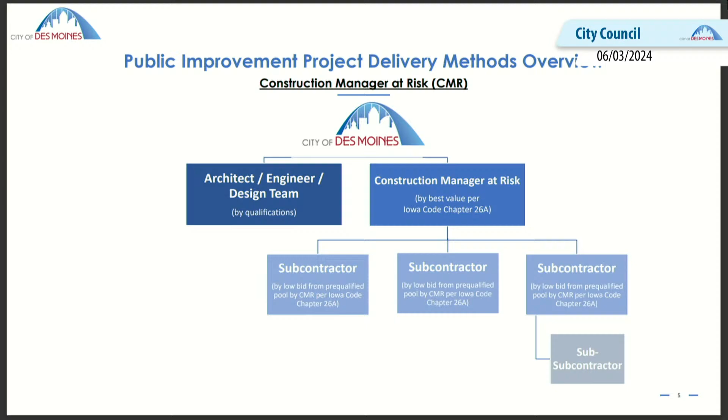This is, and I put up on the board here now, the construction manager at risk process, where we actually hire by best value, under Chapter 26A. And again, I can't thank Kathy Vanderpool and Jeff Lester and that team enough. I know the airport did a project with this, but quite frankly, as a city, this is one of the first city projects. She's in the crowd too, so I get to call her out and point her out for all the work she's done with this new process.

And not only that, we've got 3 buildings we're doing that way. Chapter 26A, best value - which isn't strictly defined in the chapter, but essentially means it's not going to be the low bid. So it's not just the lowest responsible bidder. There is a qualification-based selection process under 26A here.

As the councilman mentioned, in this process we have one contract with the construction manager at risk that we hire, and then they are responsible for following Chapter 26A, and they can use a qualification process themselves to select subcontractors. It's spelled out what they can do in Chapter 26A, and also spelled out what we're allowed to do from a selection process - I'll get into that. But again, in this case, the construction manager at risk is both the advisor and the contractor.

So this is a huge step. This is better than the CM advisor, because they are the ones at risk for delivering the project. They have the direct relationship with those contractors and suppliers. They have the full responsibility of the construction labor, materials, and equipment, and they deliver the project with a guaranteed maximum price - I'll show some information on that in a bit. Again, I want to state that Chapter 26A does not apply to highway, bridge, culvert, and sewer projects, so we cannot do this for our roadways and horizontal projects.

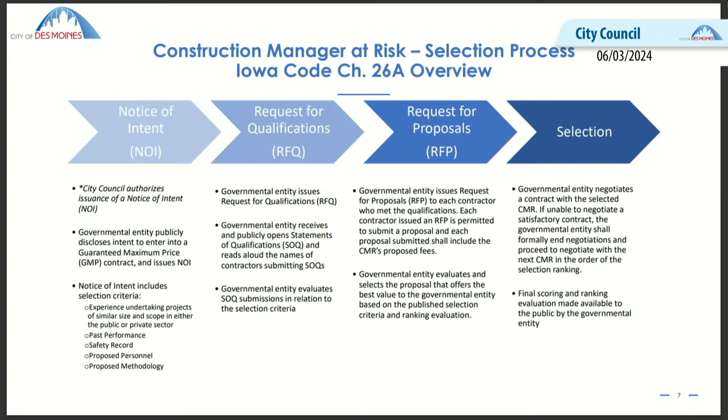Sure, everything here—and this is this chart here. Appreciate Tom Block and Jake Knutson, they helped put this together. This is our scoring, this is how we've scored. Again, you can look at the statement of qualifications—relevant project experience, past performance, safety record, proposed personnel—and then we go through and score them.

There's even cost components that we look at. And then, as the councilman alluded to, we interview and score the interviews as well. We have the construction manager at risk proposers bring their team in so we can meet with them and, to be honest, literally question them so we know that's the team we're dealing with. We're not getting someone in the back office that's just good at putting together proposals—we want to see that the team knows this process. Then we go through the selection process and negotiate a contract.

So ultimately, again, it's the same—the council will approve that contract, as you have for the three firms.

Is the project manager part of the interview process also? They better be, otherwise that would not score very well. So whoever's running the job site will be part of the interview process—the project manager and the lead superintendent as well. If the team didn't bring them, that certainly would reflect poorly. We have a scoring process for selection of professional services for engineering and architecture consultants. I haven't had a case in my almost 10 years being here where a team did not bring the project manager and the interview did not go very well. Let's put it that way.

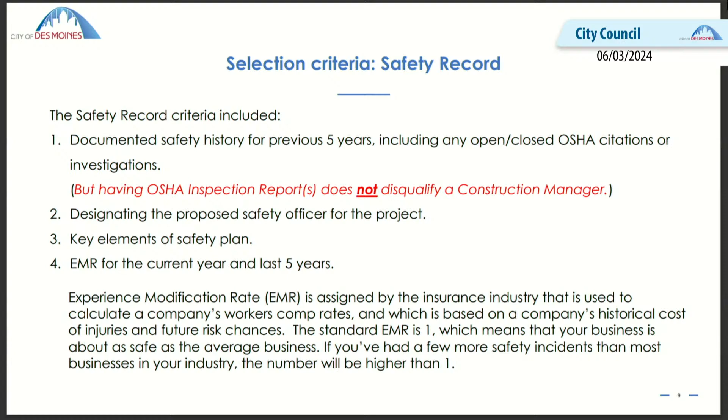Just to give an example, some of the firms we have here with us today have an EMR ranging from 0.42 to 0.62 over the past 5 years. Those are really good scores. So that's really what the information is from a safety standpoint.

Can you go back to the last slide for a second? And so the subcontracting process is under that, right? Nope, scored under the interview. Nope, I apologize—this is the process just for getting the construction manager at risk.

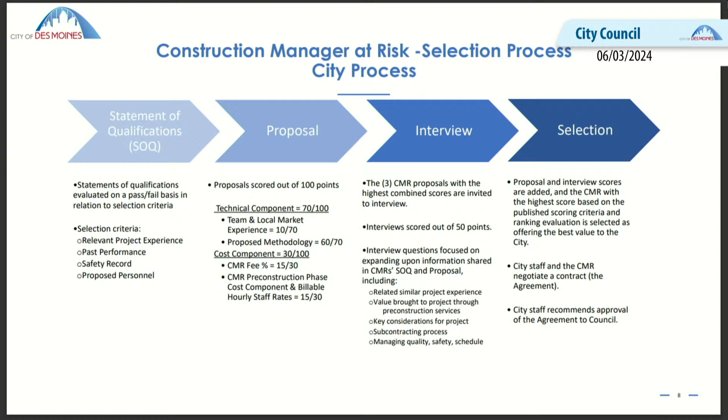The subcontractors, once we have a construction manager at risk on board, are required to follow Chapter 26A, and then they have selection criteria that tells them what they can use to pre-qualify a pool of consultants. Just to give an example, Ryan Companies for Fire Station 4 are already on board as a CM at risk. They completed the qualification portions on May 23rd, and have already set those pre-qualifications.

They've sent out bid documents to qualified bidders. Bids are due in late June, and there are 63 qualified subcontractors across 22 packages that they're bidding, with most packages having at least 3 qualified bidders. So Ryan Companies for Fire Station 4 has already gone through a pre-qualification process to develop pools of qualified subcontractors, and then those subcontractors will submit proposals, and per 26A they would select the lower bid. Thanks for that detail.

That wasn't exactly what I was trying to ask. On the interview process on this slide, it says subcontracting process, right? If they have to show that they understand the subcontracting process for 26A and how they will handle it.

We currently have our post-bid qualification right now, right? For under Chapter 26, yeah. And we've determined that can be used under Chapter 26. So that's something we could ask about, whether or not they would follow that at this stage in the process, right? So that is tied to Chapter 26, and I have a slide on that later.

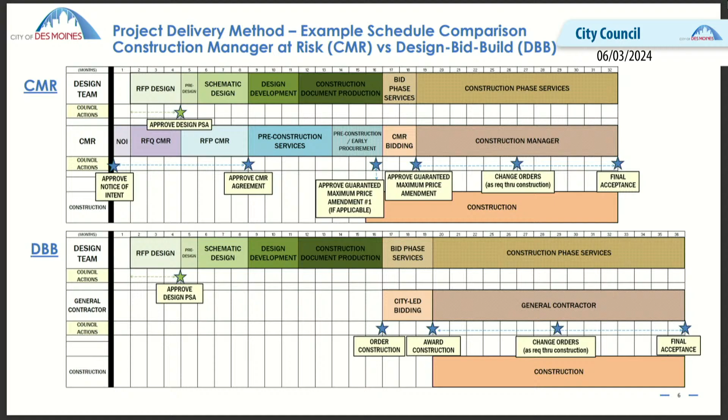So to me, this actually gives more checkpoints and leverage before going, because really in design-bid-build, they're not involved during the design. We're just taking the low bidder, and you all get to approve the contract. I see weaknesses in the other, but I also want to make sure the council has some leverage throughout it.

I don't really want to assume there's going to be change orders. I think that's the beauty of this, that the change orders and hiccups that happen under a construction manager at risk, that's where the risk is. There's going to be unexpected things that happen, and the number of change orders the council has to act on should be minimized because the manager is taking the risk, not the city. When we build in continuous change orders, it makes it feel from the beginning like a wink and a nod—you're really the construction manager at risk, but we know you're going to have to come back to us because something unexpected is going to happen. I think that's just another point where the council is losing leverage.

Those two points—as much as I like this process, I want to make sure we're strengthened there, and I think there's ways to do it. For instance, the council should have a policy about what change orders are even legitimate to bring forward under this new style, because they should be different than under a design-bid-build. In that case, we're taking bids for a project we designed and spec'd. If things have changed, we have to own that a little bit because we asked them to bid on something different. In this case, we're going through the process so they know what's happening and they're willing to take the risk to deliver it as designed.

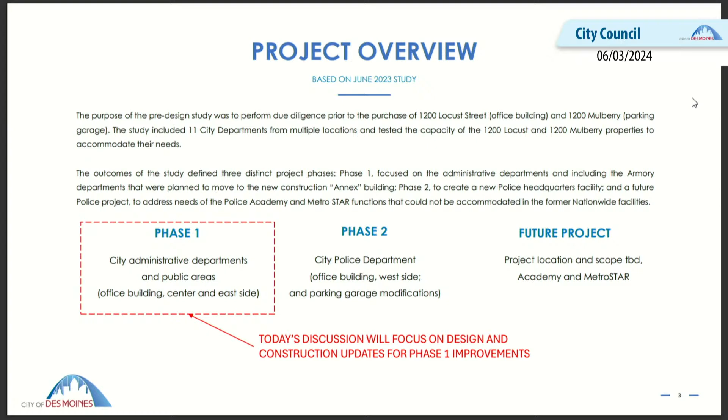It can't be because of the space or because of funding? The last one you just mentioned had to do with the specific types of functions. Okay, that's fine, I gotcha. Big vehicles and other things.

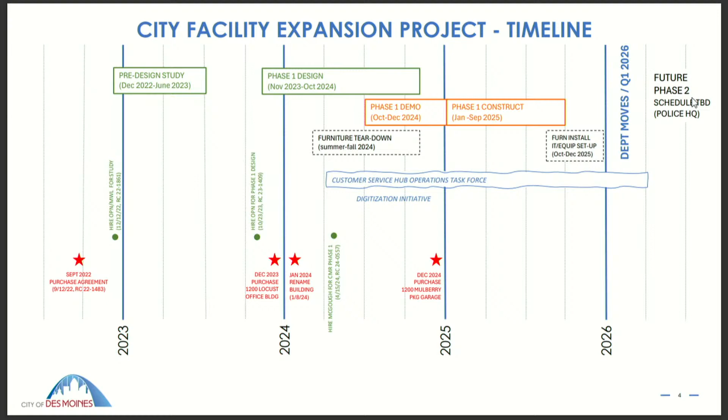On that task force, will you have only staff, no residents or citizens that will actually use the building as part of that task force? At this point, it is only city staff.

The other thing is kind of a preface I wanted to show you because this comes up a lot, especially when you start looking at numbers and size, and it's come up in a lot of our user group meetings. We made this about a year ago. This building is huge - 340,000 square feet across 5 floors. This is a footprint of the building at 1,200 Locust, showing you the comparison of that footprint with some of our existing buildings. Keep in mind, as we look at the scale of what we're doing, this building is a lot bigger than anything we have currently in our portfolio, and it can easily accommodate the departments and functions that we currently have in these other facilities.

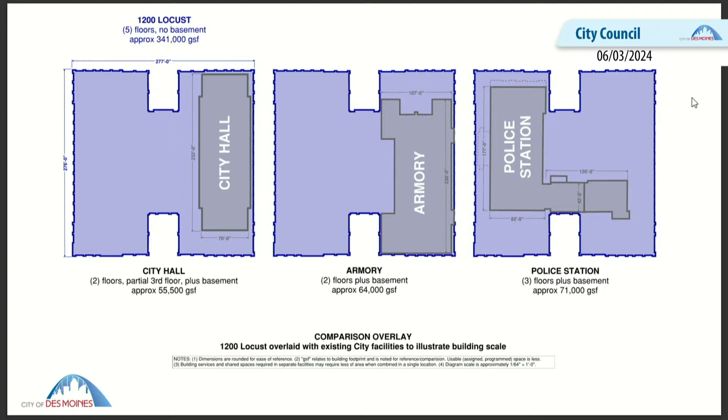This is a summary slide of some highlights of phase 1. We are renovating about 155,000 square feet, primarily on the east side and center of floors 2 through 5. There will be a quadrant on the street level that is going to be the new public meeting suite, which will include a new, much larger chambers and boardroom space. The departments planned to relocate with this phase are listed right below - basically everyone in the Armory, everyone in City Hall, our 2 departments working out of Polk County River Place, and Human Resources, currently over at MSC, will move into this building as well.

So we're relocating 10 departments. We estimate that is around 360 city staff people that will be moved into this at the end of phase 1. And that service hub, we will have 1 location, and you'll see the design concept as OPN comes up to present.

We're basically taking 8 different locations throughout the city in 4 buildings and putting them on the same level with the same kind of first point of access in this facility. The way it will work is we have a multi-layered system where there's a first stop - an information security desk location that can handle the first layer of questions. Then there's a series of transaction windows for specific transactions people have to do with the city. And then we're providing supplemental space to call down subject matter experts to handle questions related to more complex issues - if someone needs to look at a plan for their fence in their yard and needs to sit down at a table. Again, this is putting all those places in one location. In addition, the front doors to housing, civil and human rights, and human resources will all also be on that same level.

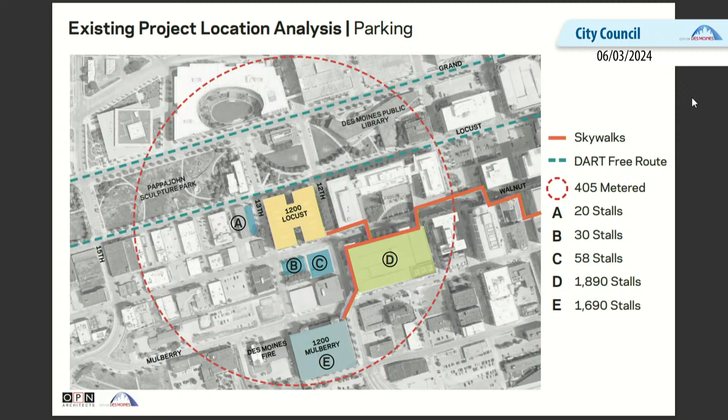Early on in the project, we also did visioning with all of the leadership and some user groups. This helped us establish guiding principles that we've used throughout the entire process, study and design, as touch points as we're making decisions. Those guiding principles included providing a welcoming, accessible, and safe facility for the community, providing modern and efficient functional work areas with more variety and more flexibility long-term, and solutions that will support and encourage collaboration, trying to break down silos between departments and literally breaking down and taking walls out between departments.

As we got further into this process, we used those guiding principles to funnel down into more specificity to create some workplace strategies. These have helped guide how we think about the actual work environments. One of those was to take advantage of horizontal and vertical adjacencies in the building, and I'll show you a little bit about how we did this.

Also improving city services, providing dedicated public-facing zones. As Ann described, that really relates to both our conferencing areas and this new centralized customer service hub space, but that also allows us to create separate secured staff work environments. And then we're going to create open office environments that allow more collaboration and flexibility, and centralize and decentralize some staff amenity and support spaces—I'll show you how those work out in the plan.

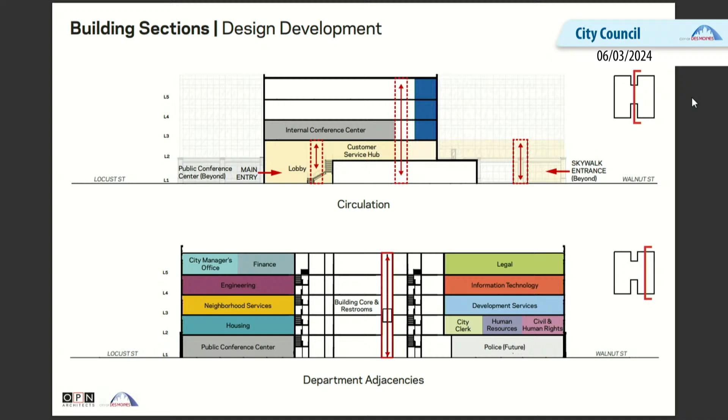So we'll take a quick look at each of the individual plans. I do want to point out that for each of the 2 centralized conferencing areas in the building, we will take a closer look, so I'll have some enlarged plans—we'll just go through these at a high level in the overall plan.

So this is our first level. This is Locust running across the top of the page here. You can see where the red arrow is at the top—that's your main public entry into that existing 2-story lobby volume. The light gray areas on the plan are all those future police zones. As Ann mentioned, we're really only using that northeast quadrant of level 1. The light yellow color signifies all of the public spaces.

So you're coming in off the lobby, you've got your pre-function zone that leads you into the new 150-person council and boardroom area. The darker gray zone is the remainder of the public conference center areas, but those are secured spaces, behind staff escort zones. I'll walk you through a little more detail on that here in a moment.

The hatching on the upper left is just indicating where we currently today have some lease spaces. On the lower left, it's all of our building services area that will remain untouched. So we will have some lease space today; in the future, it's TBD as far as what would happen with that.

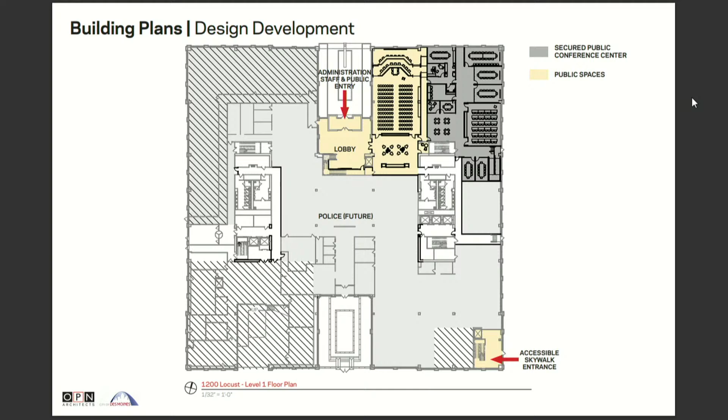Probably wouldn't have that. We have a police station there. At that point. Yeah, okay.

As we move up to level 2, that light yellow color shows all of the public areas. So you can start to see here as you come up those stairs or elevator in that 2-story public lobby, you're coming directly into this centralized customer service hub zone. You can also see how that connects to the city skywalk system, bringing people into that area all in one location.

All of the other spaces on this floor and on the floors above are secured. So you're starting to see here, and we'll see as we go up, that the police spaces stack along the west and all of the city admin spaces stack along the east.

As Ann mentioned, the groups or departments located on this floor were placed strategically because they each have a public-facing element of their own and their own entry lobbies. That's housing at the northeast corner, Civil and Human Rights and Human Resources at the southeast corner, and our city clerk, that's the light green color, off of our customer service hub.

You'll also start to see in the darker blue color some staff amenity spaces that are indicated, and I'll talk about these as they stack up through the building as well.

We've now moved up to level 3, and you'll see here our second conferencing center. This is the internal staff conferencing center located at the middle of the H of the building, that darker gray space. I'll provide a zoomed in or enlarged view of this in a moment so we can talk more about that.

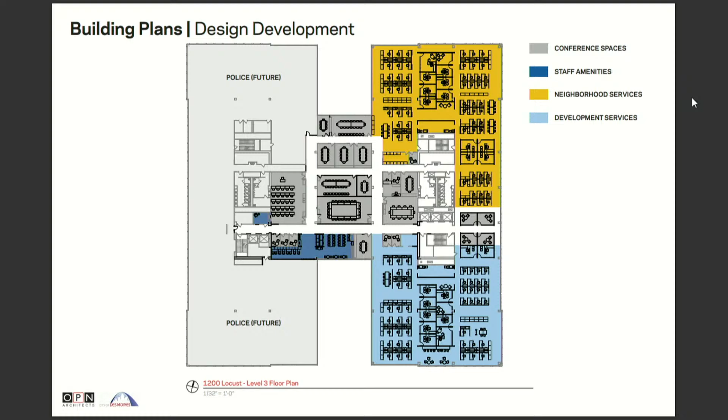These are our kitchenettes and our mother's rooms. On this floor, the kitchenette is a little bit larger, but on all of the floors we've been able to take advantage of where the kitchenettes and mother's rooms in the building were already located and repurpose those. So we're trying to take advantage of existing spaces as much as we can.

On level 4, we've got engineering located at this level, and then IT. IT was strategically placed on this floor because existing infrastructure for the previous IT department was here, so we could repurpose some of their IT lab spaces, and it gave them access to the infrastructure that was already located there, so it made a lot of sense.

The darker gray colors at the middle of the plan on this level are existing conferencing spaces that we'll just be able to repurpose as is, as they stand today. And again, those staff amenity spaces as they're stacking up through the building.

Our uppermost level, level 5, this is where we have our city manager's office. We have legal in the green color to the southeast, and then finance in a little lighter shade of blue.

Here, again, we've been able to take advantage of some existing spaces in the center of the building that are either being repurposed as conferencing spaces or used for departmental storage needs on those levels. At this uppermost level, you can again see where our kitchenette and mother's rooms are stacked.

On the first floor? So this is a zoomed in view of level 1, right off of your main public entry that you're seeing on the left where that red arrow is at.

So right when you come in the front door, there's a set of doors that will take you into a pre-function zone, and then that pre-function zone takes you into that new 150-person board and council space. We do have a couple of rendered views coming up that I'll show you of what these spaces are starting to look like or could look like.

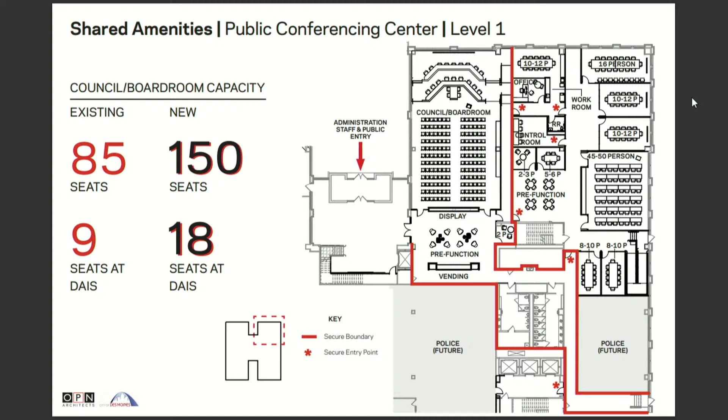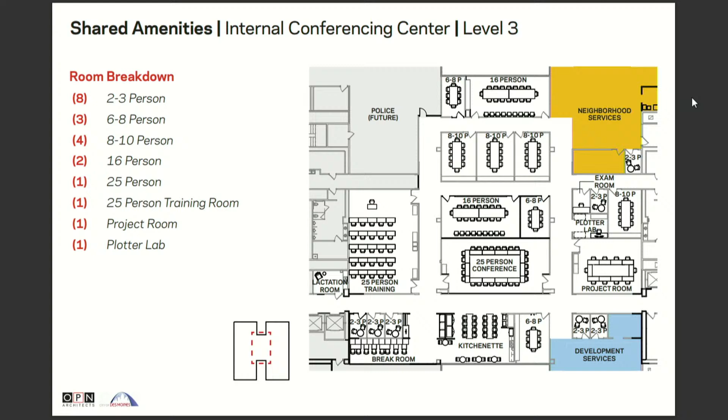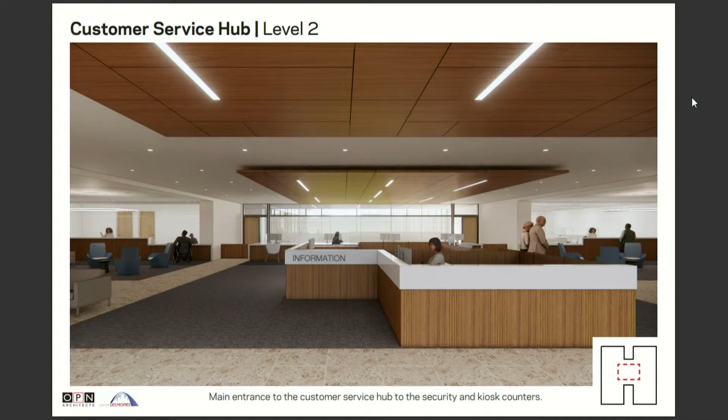This is a view if you were entering that space from the skywalk. So if you're coming in as the public at that level, from a wayfinding standpoint, you've got your information kiosk and service desk straight ahead, and then you have your transaction windows to the left, with a few public meeting rooms to the right where subject matter experts can meet with people if they need to.

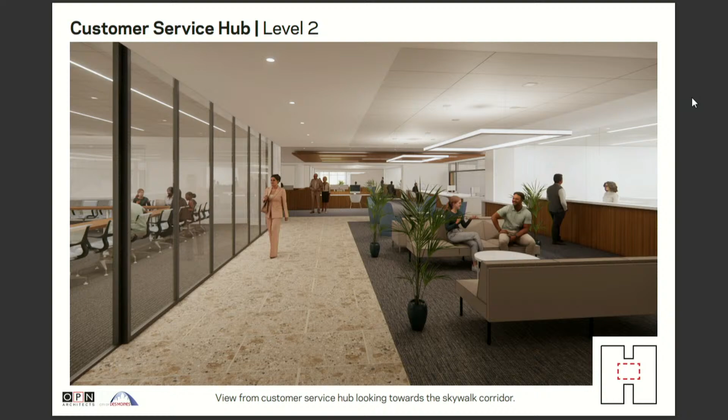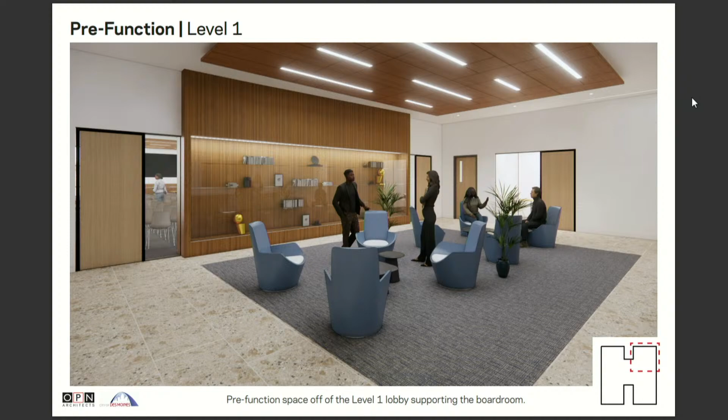Quick question. Is there a committee to deal with ephemera and various—think of all our buildings and the neat storytelling opportunities with some of the things. Is there a dedicated group to help incorporate those pieces into this new building?

That's a great question. As of yet, no. We've talked quite a bit about it, but there's not a group that's specifically working on that. I would ask the city manager to consider that, because this is a once-in-a-lifetime move. And there are lots of important historical pieces that may not even be visible, but should be visible. I would hate to lose all of that or put it all in a storage room somewhere.

There's probably quite a bit in storage. Well, let's get it out and find out. But somebody or a team needs to go through it, and that's going to be time consuming. And how to properly display it, and what do we no longer want to keep.

And we do have a lot of opportunities. I may not have pointed out, but on that front lobby, hopefully you all saw there was sort of a dashed area for future artwork. There's a couple of zones you'll see here in the next image as well. So we have an opportunity not only for some of that historical storytelling, but also to integrate public art in a couple of different ways in the building.

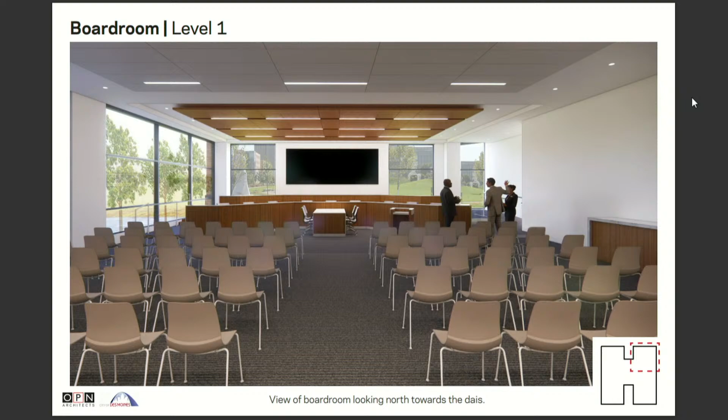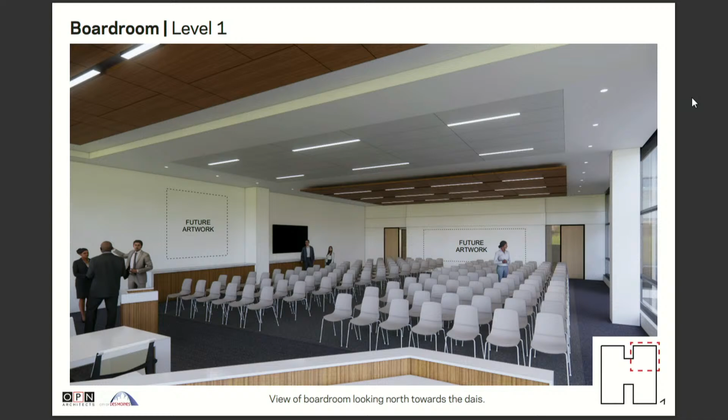This would be your view if you're standing at the dais looking out at the audience. Here again, you can start to see where there could be the potential for some of those future artwork components. I think that was the last view.

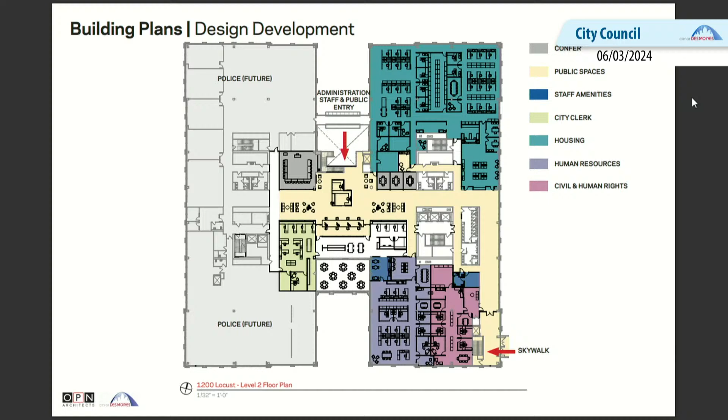Yeah, the idea is the elevator lobby where staff accesses here, you'll see there's doors by the elevators. Those would be badge access, so the idea is 3, 4, and 5 are staff only. So wherever the public goes, it'll be at base 1 and 2.

Okay, the other question was what architecture features from the current council chambers will be incorporated in the new council chambers? What architecture, she is asking maybe for clarification. Basically, is there anything from the architectural features of the current council, like there's a giant, will they be influenced in the new council chamber?

Okay, if I understand the question, the dais at the front is two-tiered instead of single-tiered. That's partially to accommodate the bigger larger boards and commissions. But some of the same kind of organization or layout that you have today would be planned, and those support spaces, much like you have here today, are planned there as well. But it would be much more modern than what we have currently. Correct, it'll be accessible and have all of the technology to support it.

So you can't incorporate any of the etchings or doorknobs or trim or anything like that into the new space? That would probably be hard to take out of here. So yeah, that might depend. I get what you're saying about the historic character. Sometimes when we leave a building, we do take things with us.

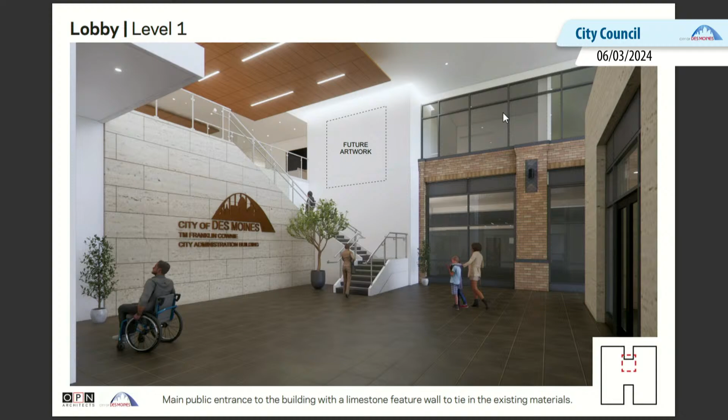Okay, anything else? If not, I would say we will reconvene, as I said, for a closed session and the regular meeting at 4:45. Thank you.